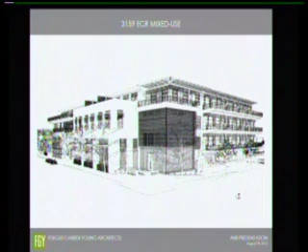Hopefully they feel that with all the different design elements creating a more open and pedestrian-friendly frontage, the project will meet with council's approval relative to their concerns about sidewalk width.

There was a number of additional plan changes that were bulleted in the staff report beyond the items that the ARB had asked the applicant to come back with, relating to some of the discussion items that the ARB had talked about.

There's a new doorway in the restaurant space that actually opens up onto the courtyard, so that offers opportunities for dining and things to happen within that portico courtyard, not just in the front of the project, but also continuing around to the courtyard side.

The entry to the central elevator tower has been reoriented and located adjacent to the stair tower. There was concern before that the entry to the stair and the entry to the elevator were so separate that people might be a little confused, so they've tried to centralize that to help with wayfinding.

The zinc panels that had previously been proposed for the Portage and Acacia stair towers have been eliminated. They're no longer going to propose that material, and they're going with the cement composite panels that was already part of the existing material palette for the project.

The openings into the Acacia stair tower landings have been enlarged, and the landings at the 3rd and 4th floor are also now open to the courtyard side, and the 3rd floor terrace now connects directly to the Acacia stair tower. So at the previous hearing, there was discussion of wanting to have some kind of visibility through that element, and so they've opened that up.

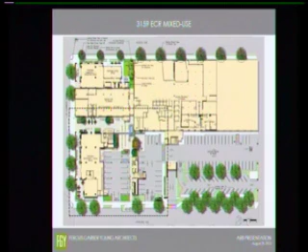The other question was about visitor parking. As I mentioned, and I think we included some transcript notes from the PTC meeting, there had been a lot of discussion about visitor parking. The requirement for visitor parking is not part of this project because we fall under the state regulation for the parking assessment of residential units. But because this is such a diverse community, and because there are already surface parking spaces for the commercial recreation, retail, and restaurant spaces, those actually serve as visitor spaces, especially during evening and weekend hours when those uses have a different time schedule. So we think there's adequate visitor parking.

The next question regarded balconies for all 48 units. As you know, 45 of the 48 units were provided with balconies, some of them quite luxurious. We went back and looked at the 3 units that didn't have balconies. One had a building code issue regarding fire separation, and our attempts to provide a balcony there didn't have the magnitude needed for it to make an impact. One on the second floor would have blocked light and air into the restaurant entry off the courtyard, and we felt strongly we needed to open that up as much as possible. You'll see in the fly-through what we were talking about. But thank you very much.

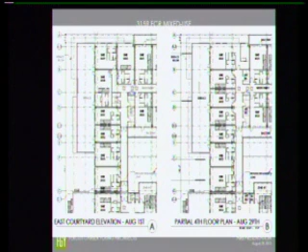We were able to reorganize these 3 units on the 4th floor into this configuration, and we were able to provide a balcony for one of the 3 units. We didn't change the unit mix or the square footages — it was a really great win-win. You can also see from the plan it helped make it more uniform and cleaned up our corridor. As you know, things happen for reasons you're not planning, so this was a great chance for us to turn that into a really good opportunity.

Another option you asked us to look at was the residential balcony design. It's hard to tell in some images, but this is from August 1st, there was a small solid panel design adjacent to the areas. We've been able to open that up so the top portion adjacent to the residences is semi-transparent glass, giving privacy while not cutting down light. The fire department is requiring some balcony-to-balcony access, so we have lower panels at the perimeter.

Security is not really an issue, anybody could climb around the railings if they chose to. We're really trying to integrate the partition design more with the wall design to increase privacy, but not inhibit light into the units.

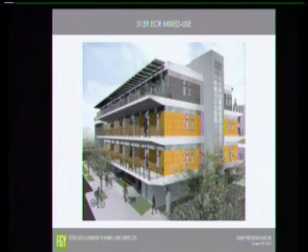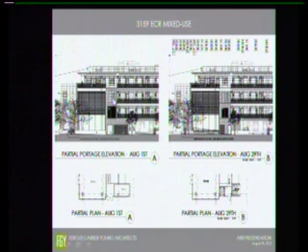The next issue was the portage service elevation, which you can see here. El Camino portage is between the residential units, the entrance to the surface parking, and the double height retail and office corner. At that time we had a more vertically oriented window on the 3rd floor, a more horizontal and larger louver on the 2nd floor for the mechanical, a pair of double doors for the restaurant service, a very wide roll-up door for the recycling and trash, and a small planter.

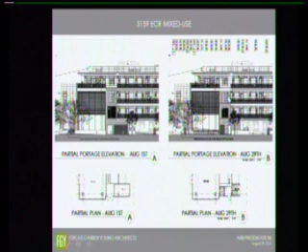By working with the green waste and Recology groups, we were able to split that large trash recycling room into two spaces and orient the trash off of the parking plaza, so that width of doorway is moved off the portage elevation, and we changed the double doors for service into a single door. That also allowed for a much wider landscape planter at grade. The louvers have been reduced in size, and we've reoriented the 3rd floor windows to a more horizontal proportion that is in stronger agreement with the design of the wall adjacent.

They're not fundamentally changing the design, but I think these minor improvements do help the overall elevation in that area.

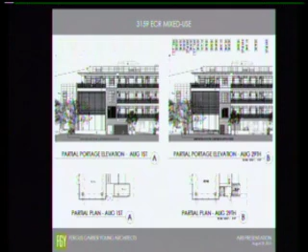You have one minute. Oh, okay.

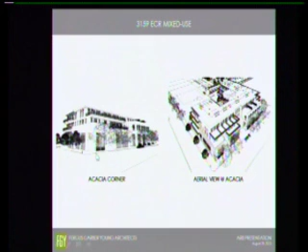Material notes - you can see the Acacia corner was rather a big issue. We were able to set back the ground floor, as Russ mentioned, and create a double height arcade, adding more sunscreens on the side. You can see the new perspective view with the setback here.

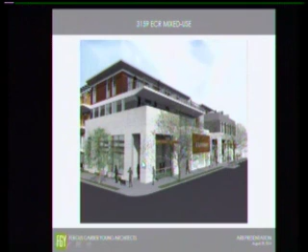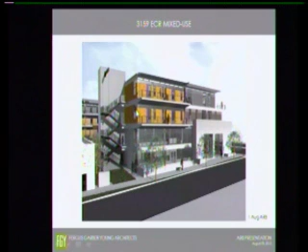You can also see the color change from the red-brown on the 3rd floor to the red-brown on the 4th floor, and now the gray on the 3rd floor. We were also able to add an additional balcony on the 2nd floor here, increasing pedestrian and building relationships. There's new openings on the 3rd floor that allow visual, and a physical connection - you can see that here with the new rendering and the new balcony.

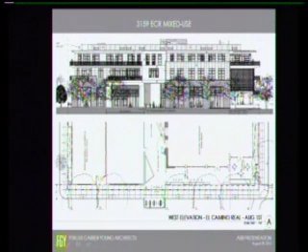We've talked quite a bit about the improvements to the pedestrian access. It just goes on and on. I can, we both just go on and on.

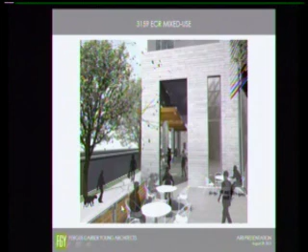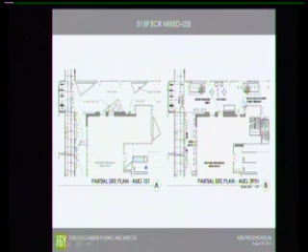Oh sorry, that's a good one. You can see the landscape is more orthogonal in its design, the new doors from the restaurant to the arcade, and the entrance into the lobby and elevator has been moved from here off of the entry portal.

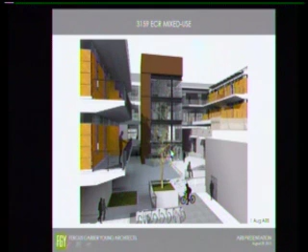Another perspective showing more of the life and activity there, and the change of materials on the stair towers. This is the previous courtyard elevation, and the change here that you'll see again on the terrace design with the screens, the lighter wood with a more open grain, which we have a sample of here for you.

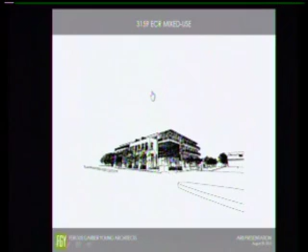Why don't you wrap it up, do the fly through and wrap it up. Okay, here's the fly through.

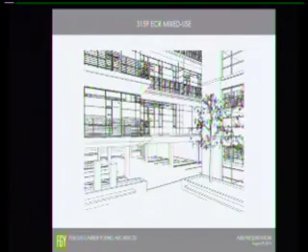More activity in the ECR portal. The stair tower has a slight redesign there to have a better proportion for the double height ground floor space. You can see the screens on the terraces as you roll around, the increase of the planter width, and there's a new little fence screen along the dining portal there.

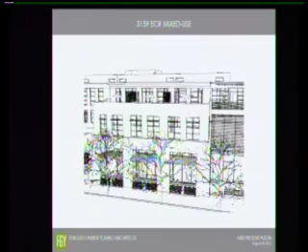You can see the roof screens on the terrace. And as you come by, you'll see the arcade, the new arcade on Acacia, and the new balcony on the 2nd floor. And there you are.

Thank you very much for your presentation. With that, what we'll do is we'll open the public hearing. If there are members of the public that wish to speak to this item, you may do so at this time. Seeing none, we will close the public hearing, and we will begin with Board Member Popp.

Terrific. All right. Well, thank you very much. Appreciate all the time you put into addressing the comments and the very detailed response. Makes it so easy to understand the process that you went through and how you got to where you are, and that's very helpful for me. I'd like to ask Mr. Lehman to come up and share if there's anything additional about the landscape plan that would be beneficial for us to understand. I think that was one of the focal points of our discussion last time and something I was concerned with, so I'd love to hear what you got.

Thank you. I'd like to bring some materials up that you may want to pass around a bit.

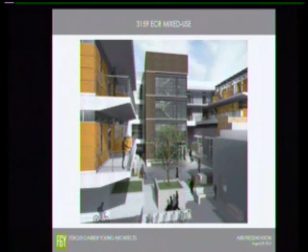I know, but we didn't get any of this in our set - the image you're showing right now, this is the first time I've ever seen it. I understand, so that's the reason why. You could take all of these images and just include them as part of the packet - that would be fine, you don't have to produce anything new, and I think all of these images are great. It's just that I haven't seen them before, so I haven't given them a lot of thought. They're here - or where are they? They're in the back. Well, some of them were in that ARB supplemental package that addressed the nine issues point by point.

Yes, I did see those. I actually included an apology because the colors for those screenshots aren't as accurate as these are.

We weren't as happy with those either. Actually, that's one of the reasons - if you look at the images on the wall, those aren't printed on the large format paper. They're printed on 11 by 17 and then attached to that. As you know, the issue of reproduction is just...

I understand, especially when you go dark - you don't get any subtlety of that. No, or from one computer to the next.

Okay, and then my last comment is signage. It looks like you're trying to put signage on the corner, on the planters. We are very clearly noting those as not included in this permit. Okay, and I understand.

And then I think, on El Camino, most tenants are going to want to put something on the building. Depending on the tenant, but any tenant who requests signage is going to be informed that it has to comply with the City of Palo Alto signing ordinance, and that they have to work with the owner as part of a holistic signage package. I think that's fine.

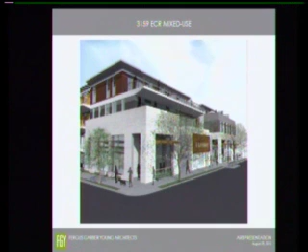I do have one minor concern, and maybe it can be addressed - that's the corner of Acacia. When you get up to the second level there, yes, right there, that view - you've got that knife edge balcony, you've got two knife edges, and they both go in different directions there. Yet at the top of the building, you've taken a knife edge and, with the cornice, wrapped that around the building there.

And then you have the lattice or trellis element that continues over the second floor of the Acacia units as you get further down the block. What I see is maybe there's a way to take that trellis element and carry it between the second and third story, bringing it around the corner and finishing that element. My concern is not just aesthetic, but also functional. How are we shielding that? Because that's the northwest direction, the west direction, and it's going to get maximum sunlight. Do you have any thoughts on that?

Very interesting observation. It's hard to really see in this image because it's cutting all of this off. We had seen the transition from the more solid cornice element to an open trellis as a transition from commercial office to residential — it's one of our signifiers. This is a particularly challenging corner because it's residential, and we'd been playing a lot with this transition from the beam to the cantilever. You're absolutely right, there's some not-quite-followed-through logic happening in this intersection that we should think a little more about.

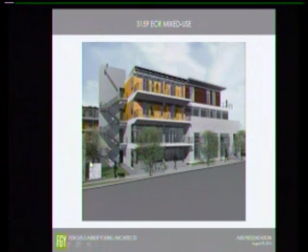I can appreciate that our solution doesn't address all of your goals. I can appreciate that. Okay.

Okay, going around to the Portage side of the building. I'm sorry, let's go back to El Camino Real. Oh, I like what you've done at the portal, above the portal, how you've reorganized the windows there. Which corner, Portage or Acacia? I'm sorry, El Camino Real. I went too far. I forgot that, I just got to get to the right spot. There, yeah, right there.

Yeah, we were very excited about bringing that terracotta down and making it a 2-story zone. Can you talk a little bit about what's going on above there?

Well, this again is that fire separation joint between the two buildings, and so you've got a third floor office and a fourth floor residential. There's matte terracotta, ribbed terracotta, and matte terracotta again, and you've got the precast concrete panel at the top and the bottom.

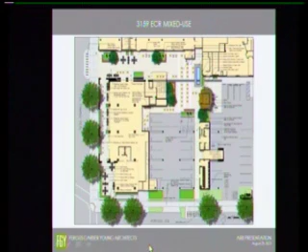Yeah, I'm not really a big proponent of downlights, particularly in outside uses. Is there a way to provide more uplight? Well, let's go back to the elevation that you have. Sure.

All the excitement on the El Camino Real face of the building happens really out almost at the street facade. Everything is proud. Remember, we talked about this last time, and we were talking about this as an arcade very similar to—I think I used the example of Vittorio Emanuele.

Where this element falls short is that I want this to be an exciting element to pull you through the building complex. With the downlights, what happens oftentimes is you've got the recessed downlights, and of course, the ceiling goes dark. I think the opportunity here is to have some element floating in there that uplights, or to get something on the walls that focuses up, so you get a more even illumination as you transition through that space.

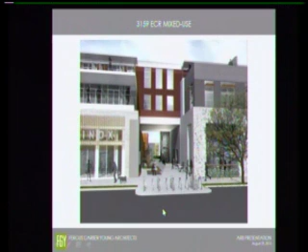We've been focusing on three elements: the succulent wall at the very end, the Ipe tower here, and the glass stair circulation tower there, in the far distance, to bring you all the way into the courtyard. But I think what you're addressing, which is very interesting, is a more short-term focal point, having an element in this area that provided an opportunity to create evening illumination, and also to provide that short-term attraction before you reached these goals that are in the courtyard. I think that's a good observation.

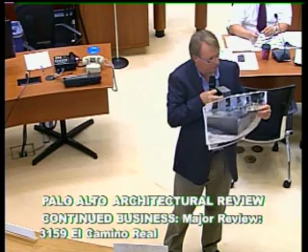So the idea is that the bar is wet continuously across the top. It has some very subtle water jets that water the entire length of the bar, and then there's one point where the cube occurs where the water is raised up, and that's where you get the animated sound, and that's where the material change occurs. So I think it's a really fun piece.

So to get the idea, it's only a water surface - there's no depth to the water in the pool. The pool is very shallow, no more than an inch, except at the place where the more activated water surface is, where it would be set down a little bit to contain the water. So there's a little bit of a reveal at the more activated water source, but the rest of it is more a reflecting pool that then sheets down the vertical face.

And does it sheet down all the way around? All the way around, that's right. So it's going to appear as a water cube? It will be a water rectangle - more like this, except rather than having this faceted facade, it would be smooth, with the polished surface going down the vertical face.

So it's a very quiet kind of piece here, and then the simple activated water at that one cube. Very, very exciting piece. And then the water would disappear at the pebbles, drops down into the cobble, and it's recirculated underneath. So there'll be pebbles at the base, just like you've got here. This shows a very narrow cobble, that cobble will be a little wider. We'll pick up on what's happening in the planters as well. Great, very exciting. I think that's going to be a very successful piece.